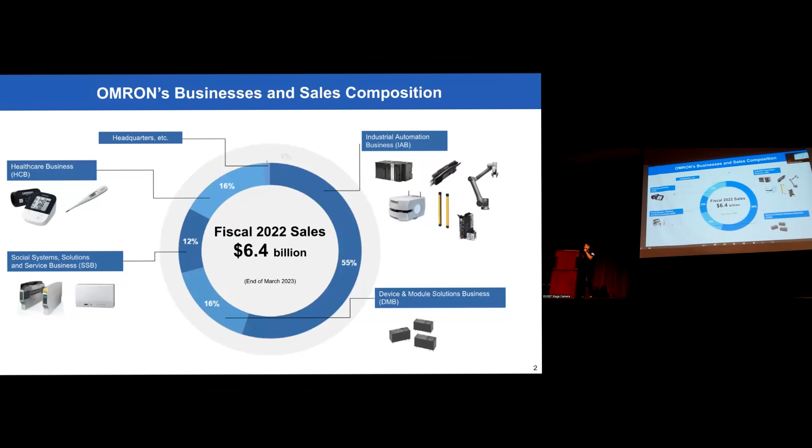A little bit more about myself. I already mentioned my name is Yaqing. I'm originally from the world famous city, Wuhan. I was born and raised there from 1985, and I studied software engineering at Wuhan University.

In 2008, I moved to the Netherlands, and I know there are European teams online too. If there's anybody from the Netherlands or north of Belgium, goedemiddag.

I lived there for 14 years. I did a business information systems study and an MBA at Erasmus University in Rotterdam. From there, I did consultancy work at a financial company called Deloitte. About 5 years ago, I joined Omron as a salesperson for industrial automation solutions. In 2021, my company moved me to Dallas, and I am now leading the strategic business development team here for Omron Americas.

However, it is ranked as the 5th most innovative country in the world. There are a few innovations from that country that you might not know of. Some of you might know about the tulips or the windmills from the Netherlands, but they are actually a country with great innovations. Think about the compact disc, Bluetooth, Wi-Fi, and now what is impacting the world a lot, the lithographic machines—they're all coming from the Netherlands.

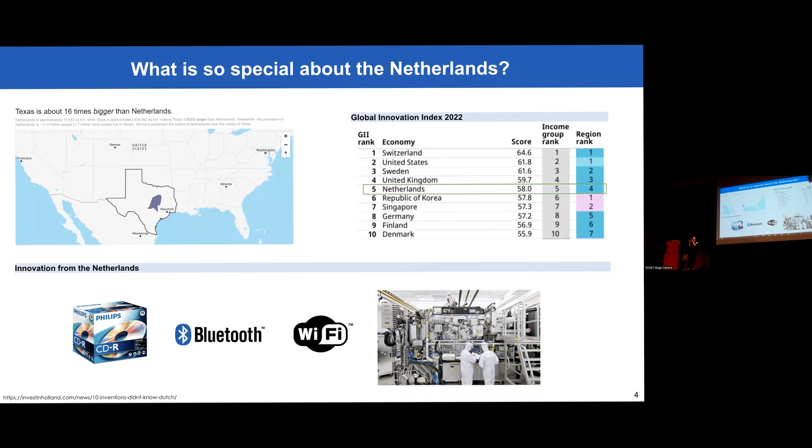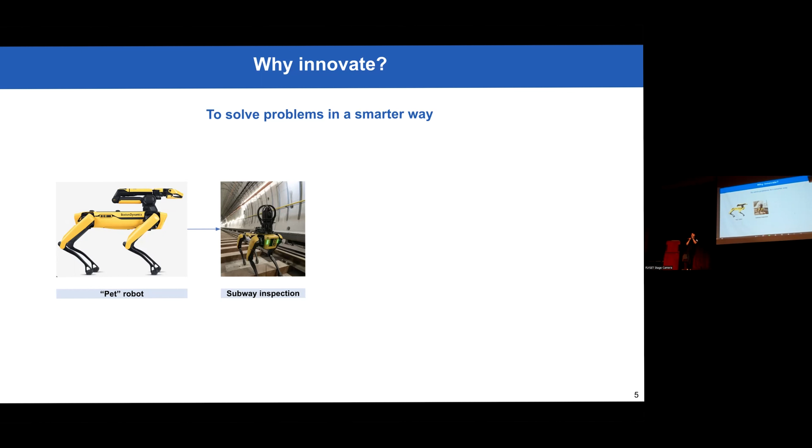You need to find or define a problem, an application, or an industry where it can be applied. Until recently, they found out this cute pet robot can actually go into dark, dirty, dangerous environments to do the jobs that we as humans do not want to do, because it has legs, it has eyes, it can do inspection. So one of the applications they found right now is subway inspections. This is a great example of finding the problem for the solution you have created.

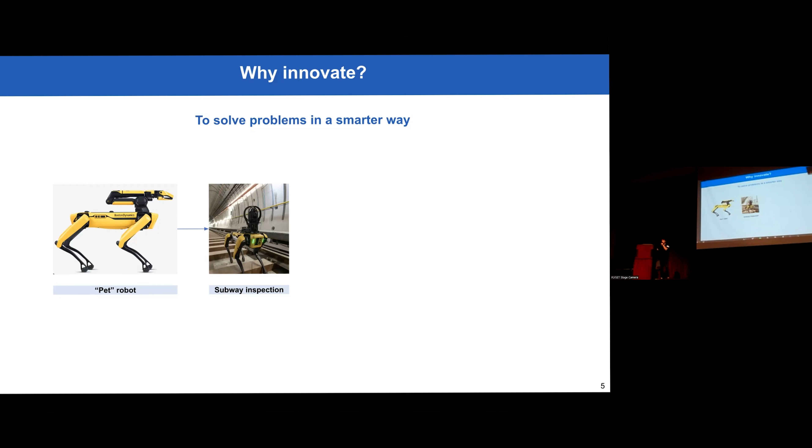What is the difference between the Omron robot and the pet robot created by Boston Dynamics? We define it as the main tool to transfer materials. However, this is also not enough to just sell the robot.

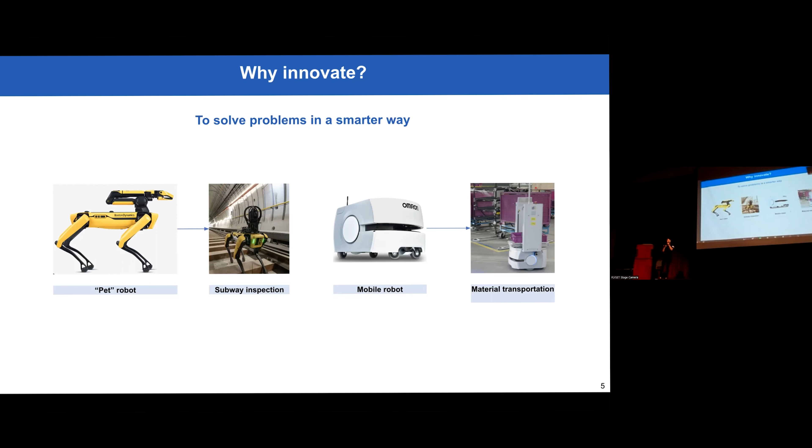So what I want to bring to you today is how do we define a problem when you already have the solution. You have created a robot that has functionalities, and how can you make it sellable or appealing to your audience or your target users?

There are a few things for you to consider. For us, as Omron, we always consider what is the industry and what is the segment. We mainly operate in the manufacturing world. However, we also have customers that have a warehouse attached to the manufacturing side, to the plant.

Sometimes for food or for pharmaceutical companies, they need to test the product, so there's a lab next to it, so there's lab automation that we could also take a look at. And all these have different environments and criteria.

Another question you can ask, how your solution could be applied to the problem, is how the problem is currently being done. That leads to what your strength and your unique selling points are. Those are something interesting to think about too.

For us, most of the tasks, because we're in industrial automation, a lot of the tasks are currently done manually. That's actually the best area where we can apply automation. But there are also automations that could already be in place, so you just need to improve it. Then you need to identify what problems the automation solution still has, so you can create an improvement.

The last point I already talked about, what are the key requirements in the process and environment? For example, in automotive, which I have a case study on later, there's specific industry standards, safety standards, procedure standards that you need to apply. For food and commodity, and for life sciences, we have the FDA in the United States that we always have to comply with.

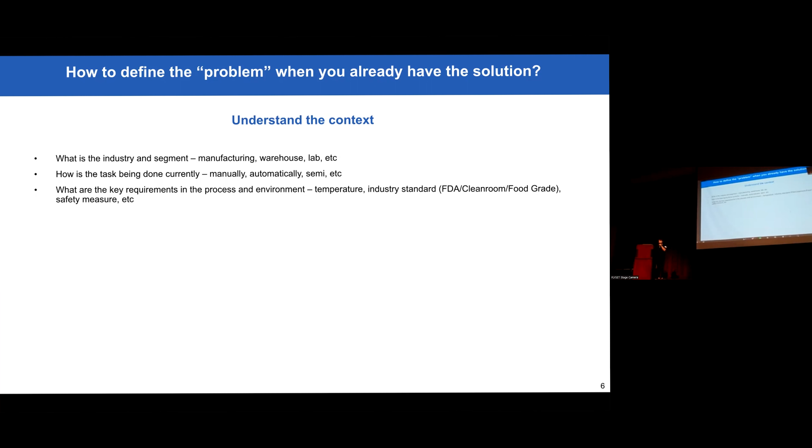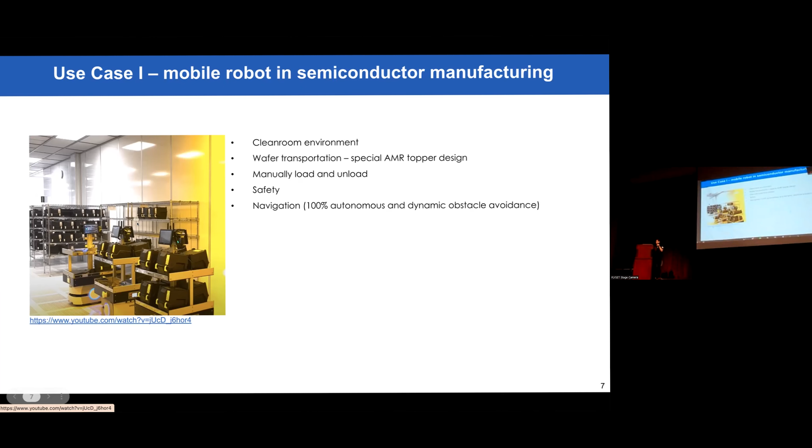So first, I'm going to go to this video here. What you can see first is this little robot at the bottom, that's the Omron product, and what goes on top of it is the customer design. I'm going to play this video, I didn't play the voice, I'll give a voiceover instead.

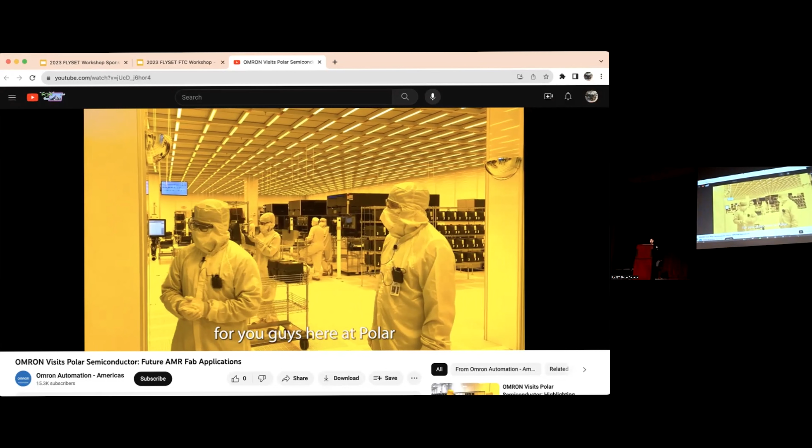So what you're seeing here is the environment of semiconductor manufacturing. You see two guys in a clean suit, like in COVID times, but it's actually because of the production requirement, there shouldn't be any dust or dirt on the wafers they're producing. That's why they're wearing those kinds of suits.

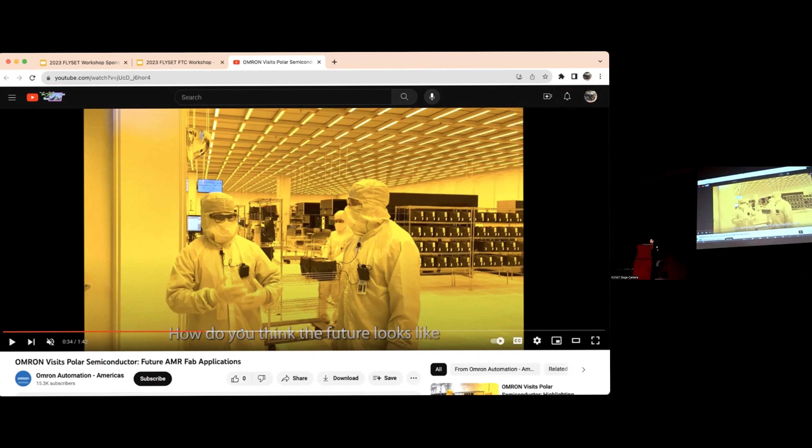I want to point out this guy in the back, he is pushing the cart. That is part of the problem, how the task is currently being done. It's done manually. And the solution we have proposed is something that looks like this.

What you can see is that first of all, it has a specific design on top of it, and this solves the problem of people manually pushing carts in a factory. It also eliminates the number of touches from human beings to the product. So all you have to do is load and unload and register the parts being transported in the environment.

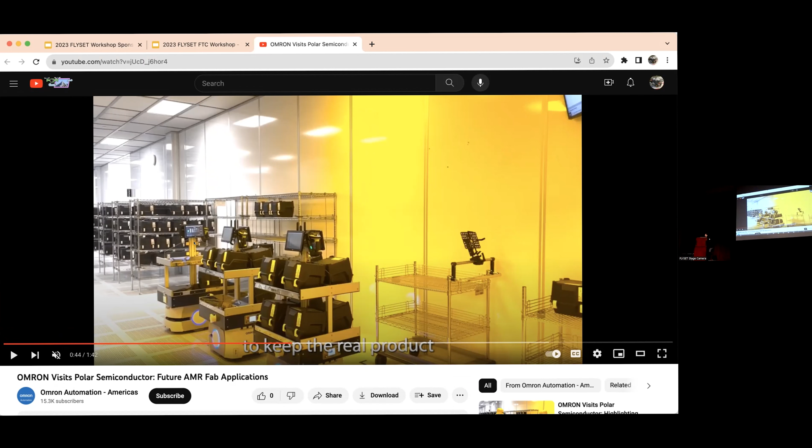Another challenge you can see in the back is that there are people in the environment, so there's another requirement for the robot to be able to dynamically navigate through a very dynamic environment without being stuck too often. Those are the things you have to consider in how you want to design your product and what problems you have to solve.

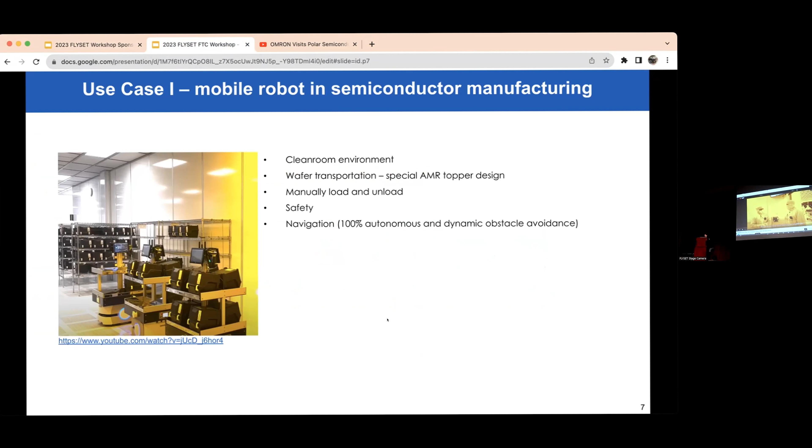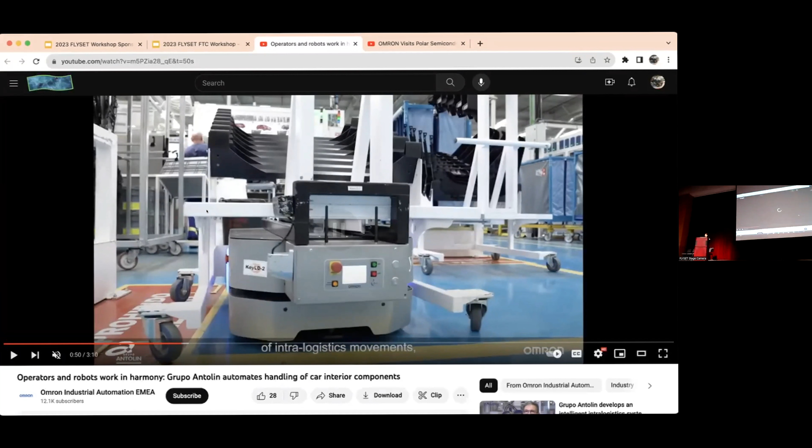If I go back here, the next case study is in the automotive environment. I'm going to quickly pause here. What you can see is this is at a company called Grupo Antolin in Spain, I believe.

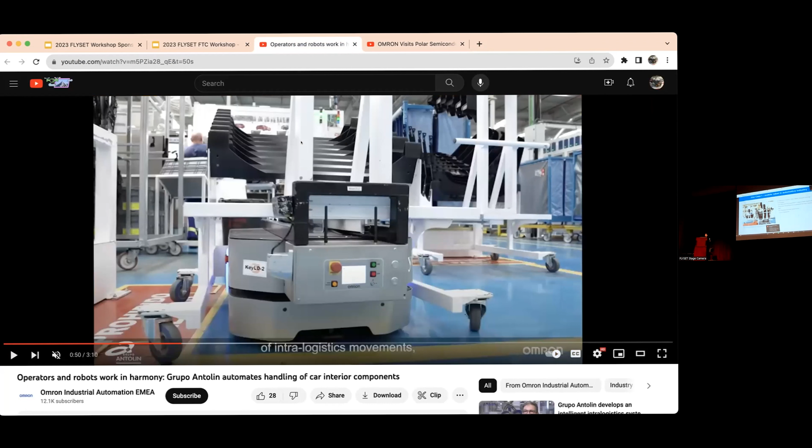They produce car seats, so these are the parts for the passenger cars that you sit in. What you see in this application is again the same product, a mobile robot, but on top it's a different design, a different mechanical design. What we've implemented is a design that directly interacts with the conveyor belt.

What's coming down the line is the product, the seats. A collaborative robot grabs the part from the conveyor belt, puts it on a mobile robot, and transports it to the next spot.

In this case there are a few things to take into account. First, there's a very strict safety requirement for automotive industries. Secondly, automotive industries have very high and tight throughput times, so automation actually helps with that.

There's a very strict support model that needs to be applied to this type of application. The technology has to be super reliable so there are no line-down scenarios. We used to have a customer that flew a helicopter to our factory site just to get one part, to ensure their line could keep running continuously. That's why this customer chose the Omron product - because we have very reliable safety technology, navigation technology, and everything around it.

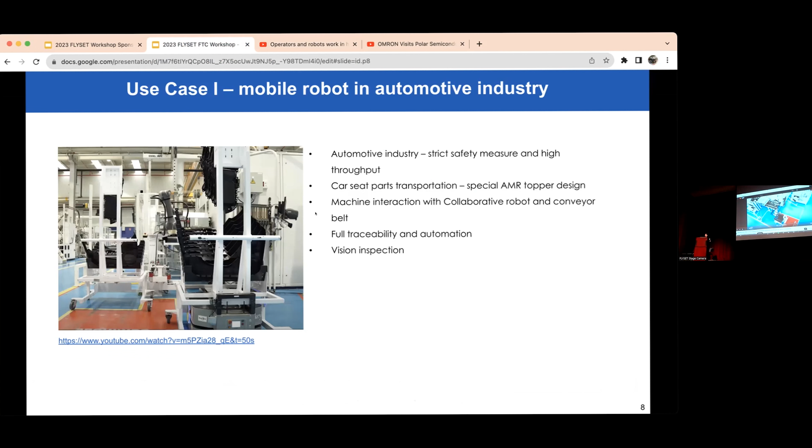This is another example I wanted to talk about. There's another part shown a bit later in the video - a vision system, a camera attached to the conveyor belt. Once you have the product from the line, you can use the vision system to inspect if there are any scratches on the parts.

For that, you can register the part, and once the robot arrives at the next station, you can say part number 3 in the middle is a damaged product, so throw it away. This creates the whole traceability of quality of the products throughout your factory lines.

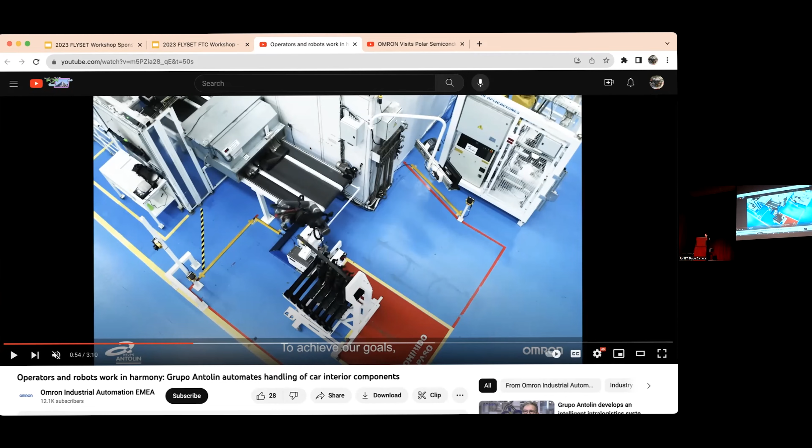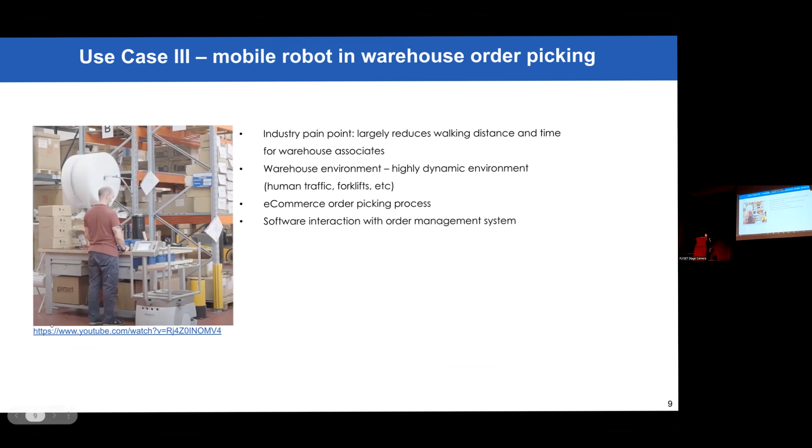Going into the next one, this is another very interesting example, in the warehouse environment. The pain point of the warehouse environment, different from the other two industries we talked about, is the long walking distance for the associates to pick orders.

The reason for that is in a warehouse environment, everybody orders something different. You might order one type of thing from Amazon and I might order something else, and currently that's all done manually. The warehouse can store about tens of thousands of different products in inventory, and it takes intelligence to manage those inventories correctly, and it also takes space to store them.

So what you're seeing here is, again, a mobile robot that has a specific design that looks like this. Each of these totes stores an order with a QR code, and the order management system shows you where to go to pick up the order, which order to pick, how many you need to pick, and then registers it according to the system.

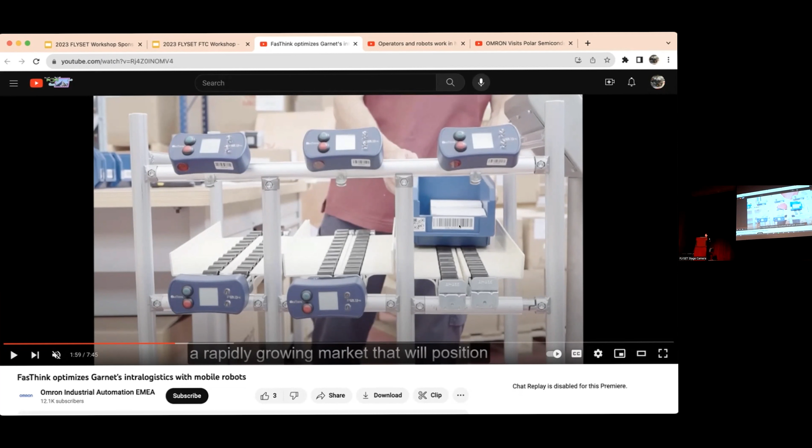In this case, the warehouse has a very dynamic environment because all the shelves, forklifts, and people could be moving in different areas at the same time. That requires very high reliability of navigation from the robot, which is the strength of the Omron robot.

On top of that, what I actually studied for my bachelor's is software engineering, which covers the intelligence of managing orders, path control, traffic control, battery management, and everything around the robot. So you design a robot with specific hardware and features, but how you apply it to the industry is critically important.

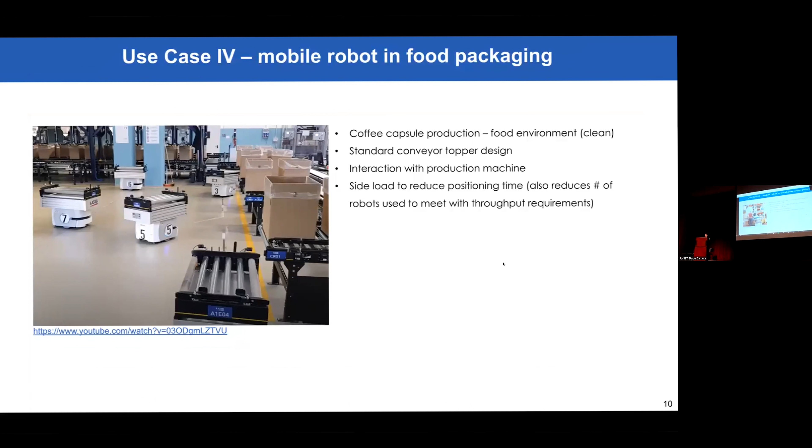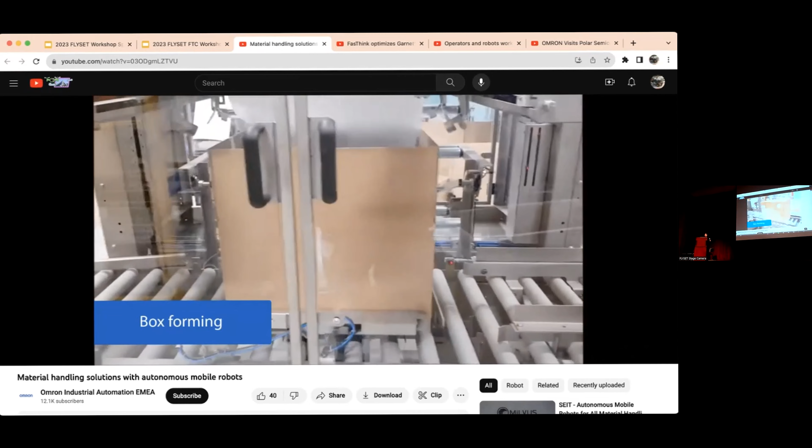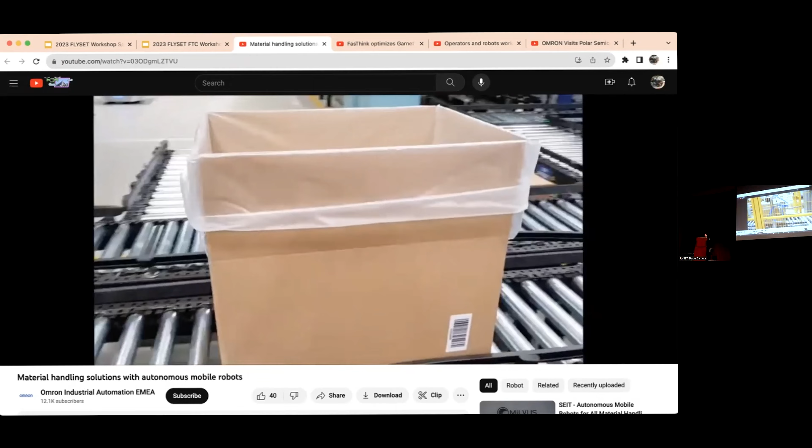Moving forward, the last example, a video I really liked because it shows the manufacturing process of coffee capsules. In this video you see the case erector machine forming the box, then it puts a plastic bag into the box because it's a food-related product, and shapes the box into the correct form. Then the mobile robot comes to the conveyor belt to pick up the box and bring it to the next machine.

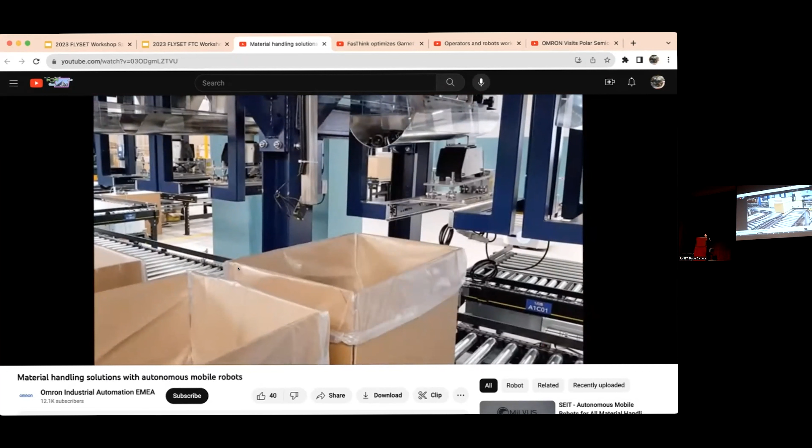Here you can quickly see, though it's not very clear - if you rewatch the video - these are Nespresso capsules, empty capsules that you buy from shops. Then, as I said, the mobile robot is used to pick it up and bring it to the next line.

In this case, you'll see there are multiple robots in the environment. What's important is how you manage job allocations, which robot goes where. That's again on the software side, not on the hardware side.

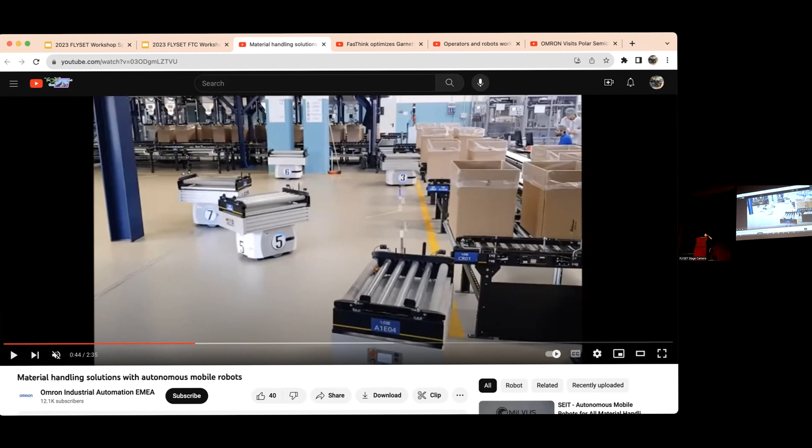Because of the throughput time, most robots are docking vertically backwards, but in this case the robot is going sideways to the conveyor belt. This increases efficiency and reduces the docking time.

So in this case it reduces the number of robots needed, because what drives this is the production speed, not the speed of the robot. You want enough robots to manage the production volume from the lines. If you can reduce the operational time of the robot, you can reduce the number of robots.

Most of the time the robots run autonomously, but because of the very tight space, we're actually using magnetic tape to help the robot positioning against the conveyor belt.

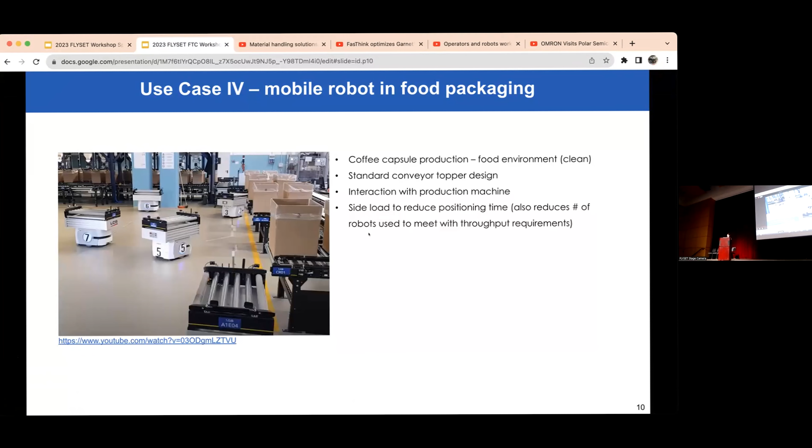All these examples have YouTube links you can go back and watch online. The last example I don't have a video for because it's actually a picture I took from LinkedIn, but I like this project a lot because it again shows you can have a solution, but the challenge of the application doesn't lie in your solution.

So we spent a lot of time designing and identifying materials that can transport the hot tires without damaging them.